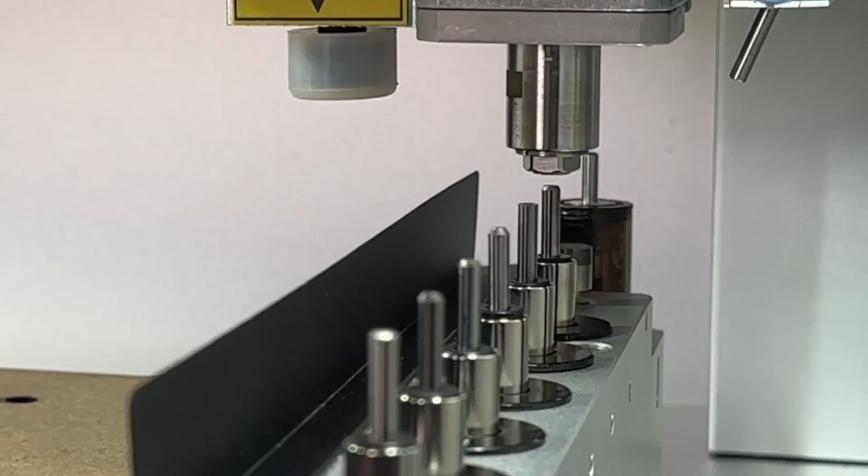Hi everyone, Jason here with another Makera CAM example project, and in this one we're looking at how to machine a multi-part wooden phone stand through one of our Easter themed and spring projects.

First, you can grab any of the files you need for this project from the knowledge sharing page on our wiki site. If you scroll on down, you'll see that we include all the files from all of our examples that we show. So for the Spring 2025 example projects, you can choose to download the Rabbit Phone Holder DXF file that we'll be using in this tutorial, or instead you can choose to download the completed Rabbit Phone Holder MKC for a full Makera CAM file, which we'll be creating throughout this tutorial as well.

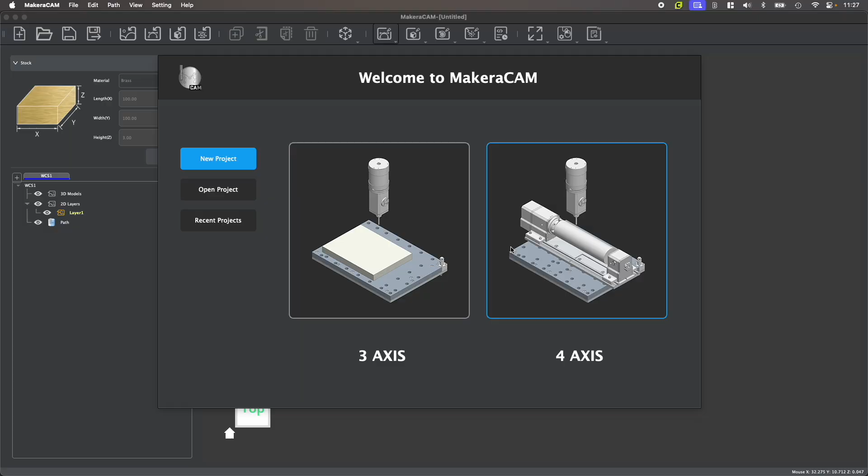Once you've launched Makera CAM, we can create a new 3-axis project, and the first thing we want to do is set up our stock to match the stock that we'll be using accordingly. I'll be using a piece of hardwood for this project that is 150 millimeters in length, 150 millimeters in width, and about 20 millimeters in height. So I'm going to set up my stock accordingly, like so.

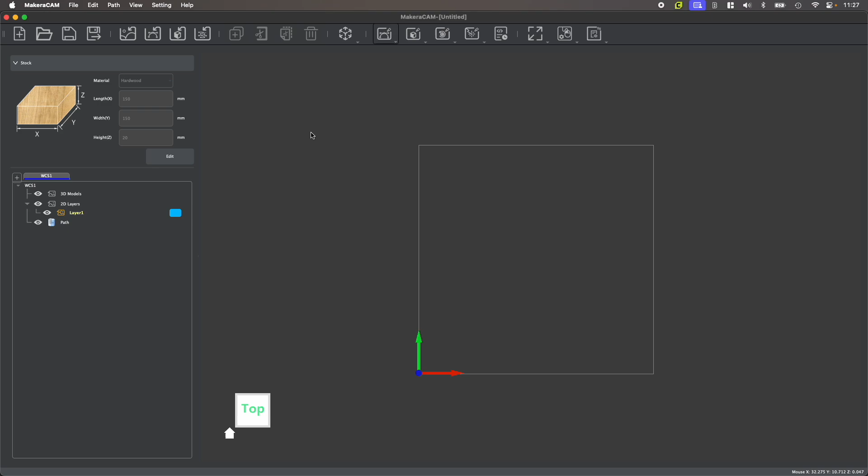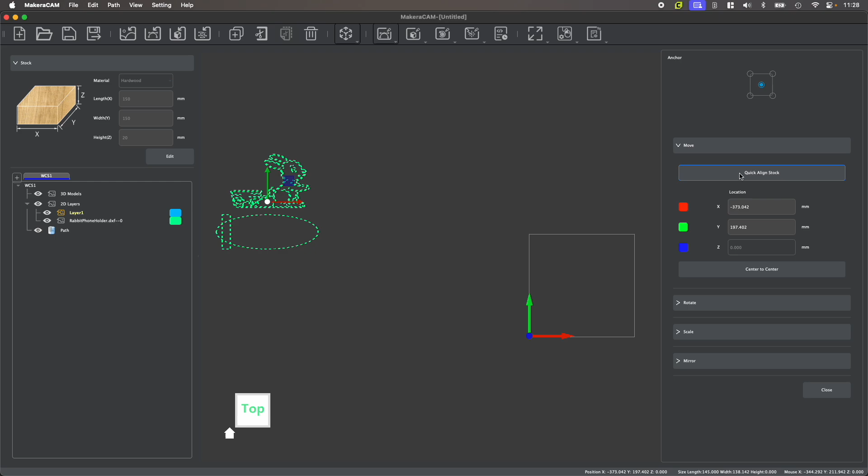Next, we want to import the design file into this document, which showcases how Makera CAM can work with 2D vector files as well as 3D design files like we show in some of our other tutorials. So I'm going to import that 2D DXF that you can grab from our wiki site, and you can see that it might not first land in the correct spot on your stock here. So after importing your designs, you can easily use the transform tool to move things, and I'm going to use the quick align stock button to center this design on our stock automatically, like so.

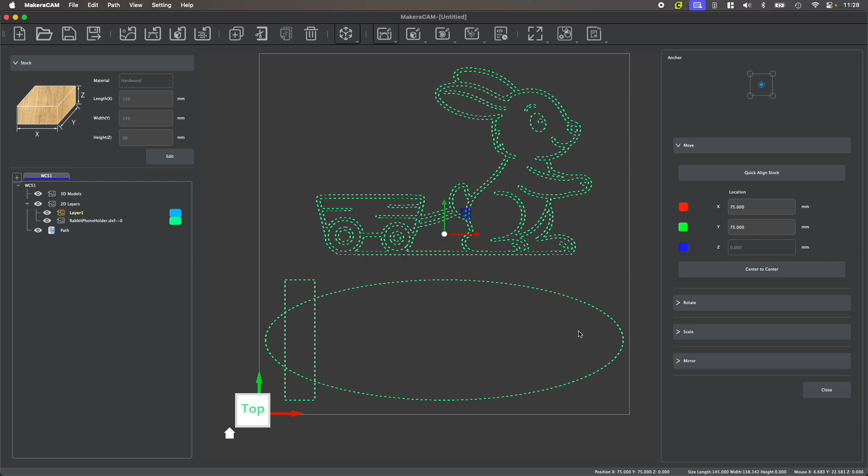You can also use the transform tool to rotate, flip, or mirror any designs that you import as well, though that won't be necessary as this fits onto the stock that I'll be using. You do also want to make sure that you have enough room around your design for any of your clamps and things like that. So keep that in mind on where you might put your clamps as you import your design here.

Now, this is going to actually be a two-sided project where we're going to machine the top side and then flip our stock over. And there's a couple different ways you can do this, but one of the best ways to do it is using simple alignment pins, where we might just insert pins in our design to help flip our stock over.

And I don't have any holes in my design to use for alignment, but we can use Makera CAM's Create feature by clicking on our Transform window and then clicking Create to create a simple 2D model. And we can create a simple circle that can be used for our alignment holes. So I'm going to make a circle with a diameter of 3.175 millimeters, or 1/8 of an inch. And I'm going to just simply place that hole somewhere in my stock that isn't too close to my design, like there.

Now, we need at least 2 holes for alignment. So I'm going to select this hole, then go to my transform tools and go to mirror. And what I'm going to do is I'm going to mirror the hole, but not along itself. I'm going to mirror it along the stock center, and I'm going to create a copy. So now when I generate this mirror, it mirrors the hole, but it actually mirrored it over the center of my stock in the horizontal direction. So now I have 2 alignment pins that are perfectly aligned horizontally and centered with my stock, which I can use to flip my stock over later during the manufacturing process.

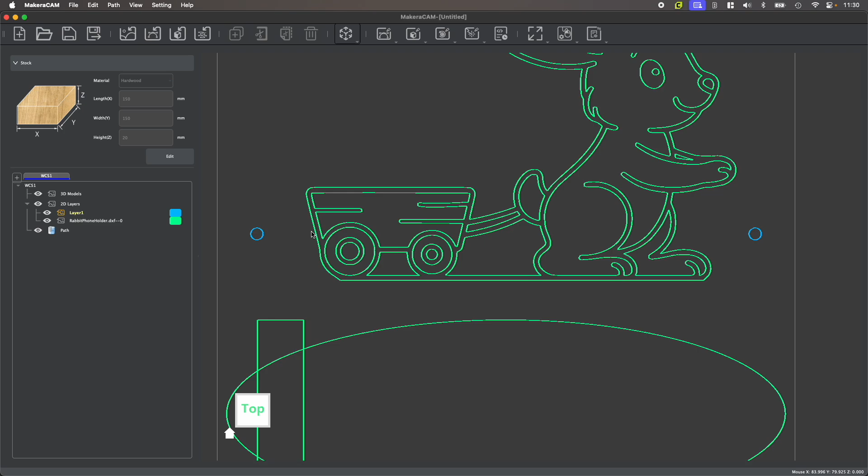Okay, so at this point we have set up our stock, we've imported our design, and we've also created some holes that we'll be using for alignment. Now, let's actually start to prepare the toolpaths for manufacturing. And we typically start with the smallest toolpath to the largest toolpath. So I'm going to select the intricate details of my rabbit here by selecting my rabbit design, like so.

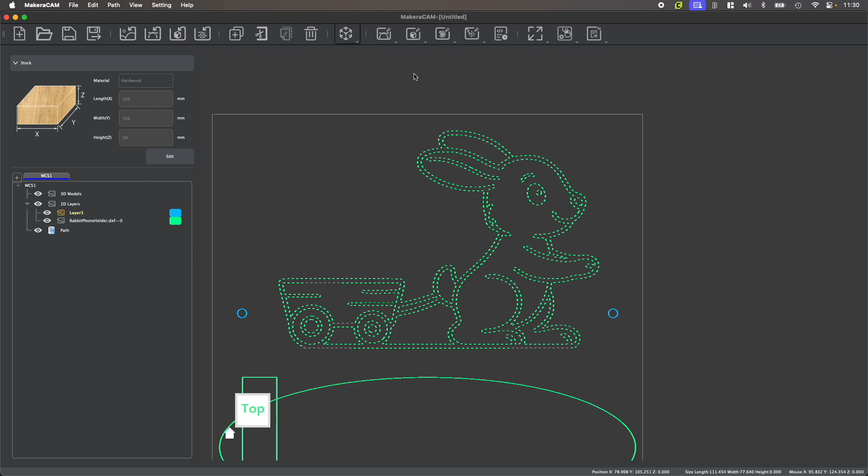And then we're going to use this to create a pocket. So what I'm going to do is create a 2D pocket toolpath. Okay. And the first thing we want to do is set our end depth, because we're working with a 2D design. That's something that we can set manually. So I'm going to set my end depth to be 0.5 millimeters to machine this pocket to be about 0.5 millimeter or so. I don't have to change my safe positions or anything like that,

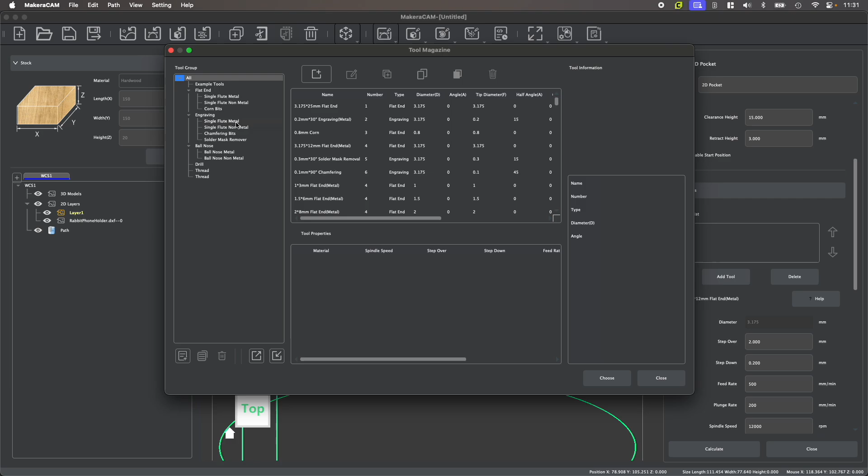but I do want to change my tool. So I'm going to delete the tool that I was using in my last pocket and instead grab a single flute engraving bit. So I'm going to grab a 0.5 millimeter engraving bit for this project, so a slightly larger engraving bit because it's a slightly larger pocket here that we're working with. And notice that my tool properties were set to hardwood automatically based upon the stock parameters that I set earlier.

So you might consider adjusting your default parameters, but in general, these default feeds and speeds are a good starting place to work with. One thing that you might want to change is your tool number to correspond to either the order that you're using this tool, so for example, I might use this tool first, or the number that this tool is loaded in the Carvera's automatic tool changer if you're using the Carvera for this project.

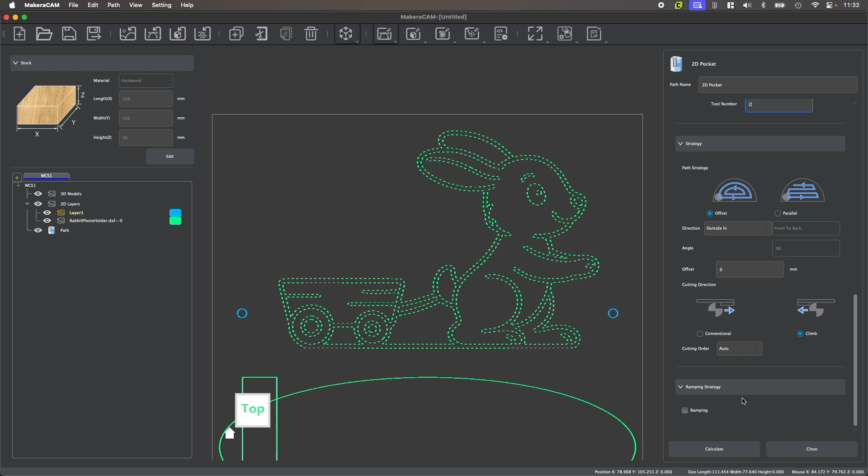Next, we can look at our path strategy. Offset works really well to clear out an intricate pocket design like this, so I'm going to leave that as offset. And I don't need to use ramping. That's a more gentle way to enter your stock, but with something softer like wood, that's not always necessary. But if you were using an engraving bit with metal, you should absolutely consider using ramping, as we discussed in some of our other tutorials. So I'll calculate this, and you can see we now have our pocket design for our rabbit here.

Now, the next thing that we'll do on the top of our stock is we can drill these holes. So I'm going to hold shift and select the 2 holes that we created, and now create a 2D drilling toolpath. So for our end depth, we want to drill not only through our stock, but also through a piece of wasteboard that we'll put below our stock that we can insert our alignment pins into. So I'm not going to drill to a depth of 20, I'll drill to a depth of 25 millimeters, which will be enough to plunge 5 millimeters into whatever wasteboard I put below my stock.

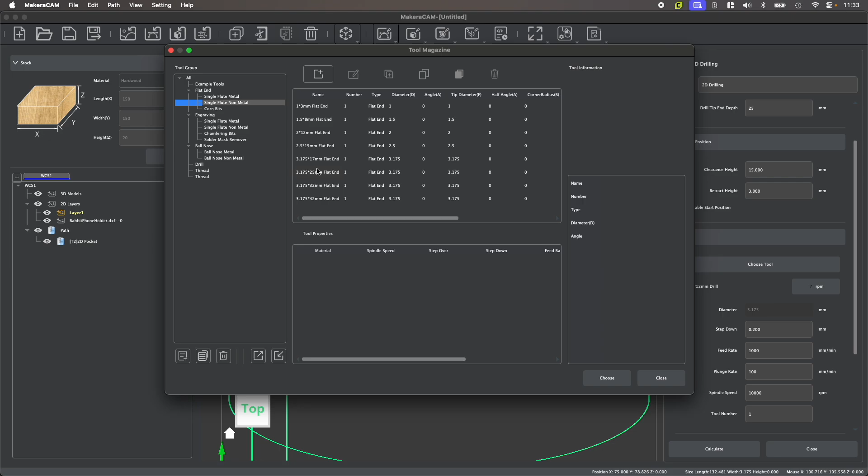For the tool, you would typically select a drill bit, but I don't actually have a drill bit that's long enough to do this. I don't have a 25 millimeter drill bit on hand. So instead, I'm actually going to use a single flute end mill. I can use my 25 millimeter or 32 millimeter end mill to do this drilling operation as well. So this is a 3.175 diameter bit, so that'll fit in my 3.175 holes for my 1/8 inch alignment pins just fine. I have hardwood selected as my default cutting parameters. And I can again choose to modify these parameters if I'd like, or change my tool number if needed.

Now we do want to enable a retract, so the retract will prevent this tool from just plunging straight down, and instead we'll actually use like a peck drilling operation. So I'm going to choose a relative retract, so it will retract a little bit each pass, and I will keep this to be a relative retract of 1 millimeter. That should work fine for this path strategy, and then I can calculate this toolpath.

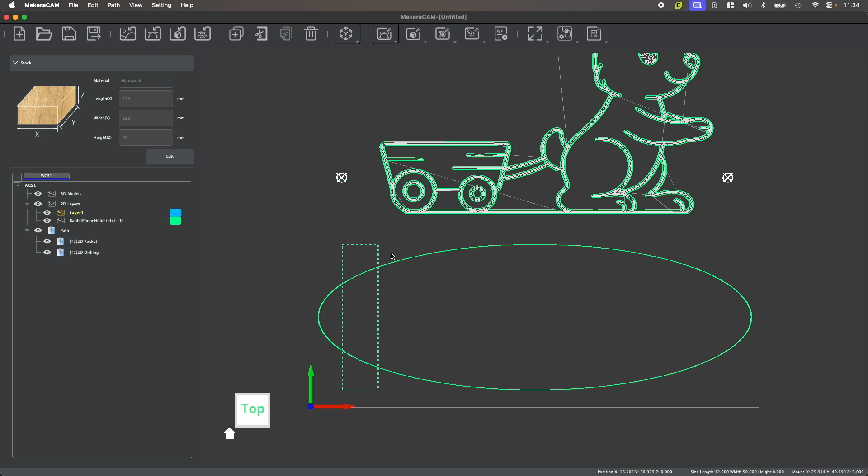And then we have one more thing we're going to machine for the top here, and that's going to be this pocket where we clear out the area for the phone to rest in, a nice little pocket here. So let's create another 2D pocket toolpath. And for the end depth of this one, I'll set this to be 6 millimeters, which should be a nice pocket for our phone to rest in. And for our tool, I think I'm going to use the same tool I used earlier for the drilling operation. So I'll select my 3.175 by 25 millimeter end mill.

This is much longer than I need, so I could instead choose to use, let's say, a 12 millimeter or even an 8 millimeter end mill instead. But this will prevent me from having to do another tool change, and there also won't be a lot of stress on this bit. So a 25 millimeter end mill would work fine. For a pocket like this, you also might consider using a ball nose bit if you wanted to. That would also work fine. So there's a range of bits you could choose to do some type of pocket clearing path like this.

I could again choose to modify the parameters, but I won't change my tool number, so it'll be the same tool number assignment as in my previous toolpath. That way I won't be prompted for a tool change for this one.

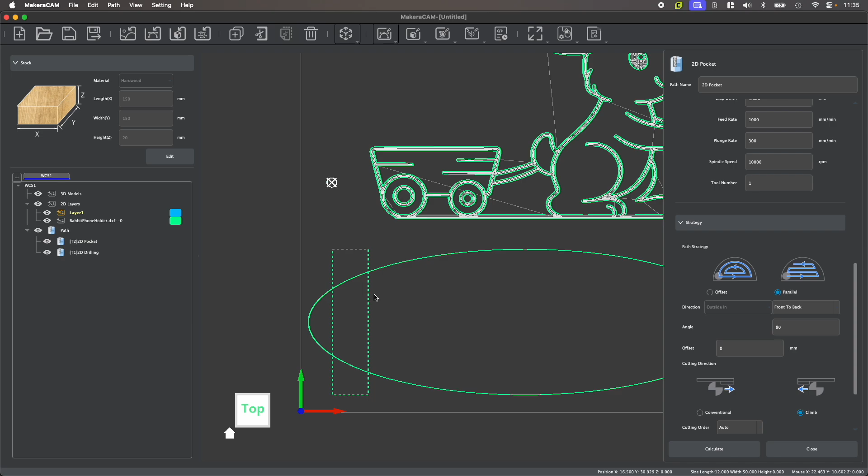This time, for the path strategy, let's choose parallel. Rather than tracing the perimeter and working around in an offset, parallel will just sweep back and forth, which is a little quicker for clearing out a larger area like this. It's not as well refined for something intricate like we did earlier with the rabbit.

It should work well for this pocket clearing path. Again, I'm not going to enable ramping, as we discussed earlier—it won't be necessary for wood. So I can calculate this, and that'll clear out this pocket.

And that concludes the toolpaths for the top of the job. We won't cut out this part from the top. We will cut the part out from the bottom.

At this point, I'm actually going to right-click my paths and save these paths and export them as a G-code file for the top, as we go here.

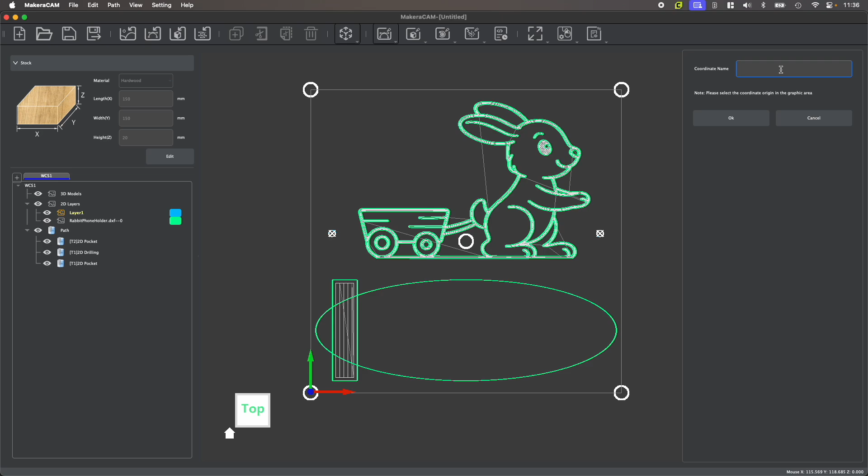I'm now going to start working on the bottom. You could in theory make a new design document, but in MakeraCAM, we can also just create a new work coordinate system that works with the bottom. Let's click this plus button here, and let's name this new coordinate system bottom.

Then what I want to do is rotate and flip around, just like I'm going to flip my stock in the real world. You'll see that our default origin point is the bottom left corner of what would be the top of my stock. So now I'm going to rotate this around.

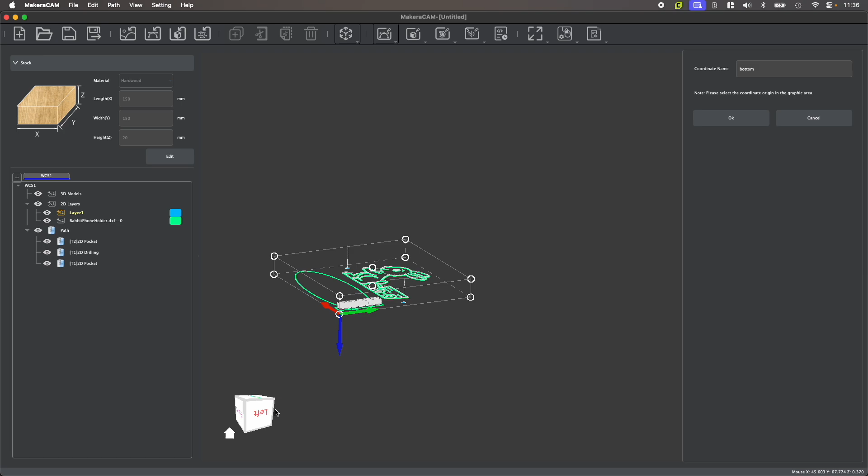So I'm looking at the bottom of my stock, and I want to select what would be the top left corner of the bottom of my stock, which would be this corner right here. That's going to be my new origin point for the bottom work coordinate system. I then press OK, and you'll see we have a shadow of our toolpaths and design on the bottom of our stock, which is actually the top, but the new relative bottom, if you will.

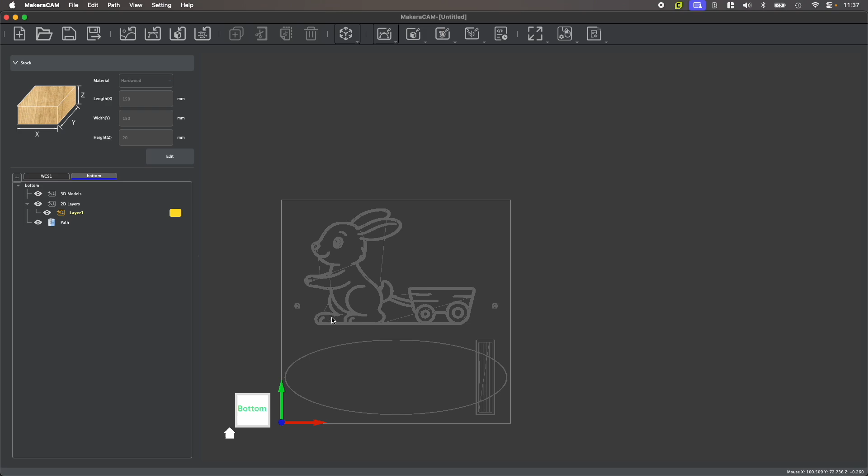Now we can re-import those vector designs we used earlier, and we have to get things aligned here. Using the transform tool, I'm going to click move and do my quick alignment, just like before. If you made any scaling adjustments, you'd have to scale this to be the same as before, and you could use manual alignment or set manual positions.

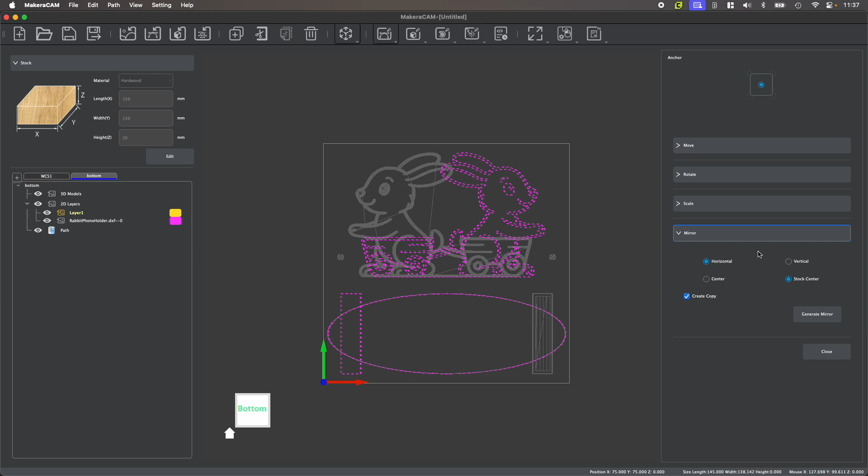And then we're going to mirror this across the stock center, but I don't want to make a copy, I just want to mirror it. That should align my design just fine. You can see with the shadow of our work coordinate system preview that everything is nice and aligned there.

You could also use the center to center tool to align your design features if you couldn't mirror things. That works well, as we show in some of our other videos. But this was a pretty simple alignment and flip.

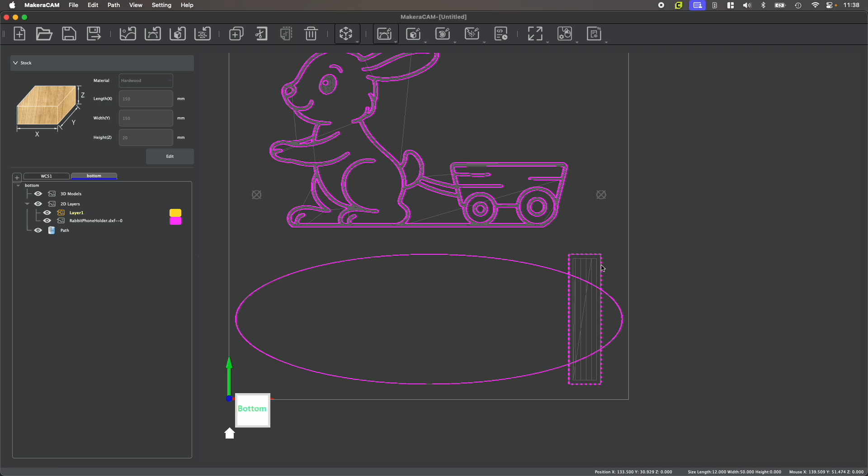Now, we won't actually need this box because there won't be a slot for the phone on the bottom of the base part here, so I'm going to delete that box.

If you find that the toolpaths are distracting from the first work coordinate system, you could always come over to your first work coordinate system and just hide the different features, so that from the bottom you can't see those if you find that a little distracting.

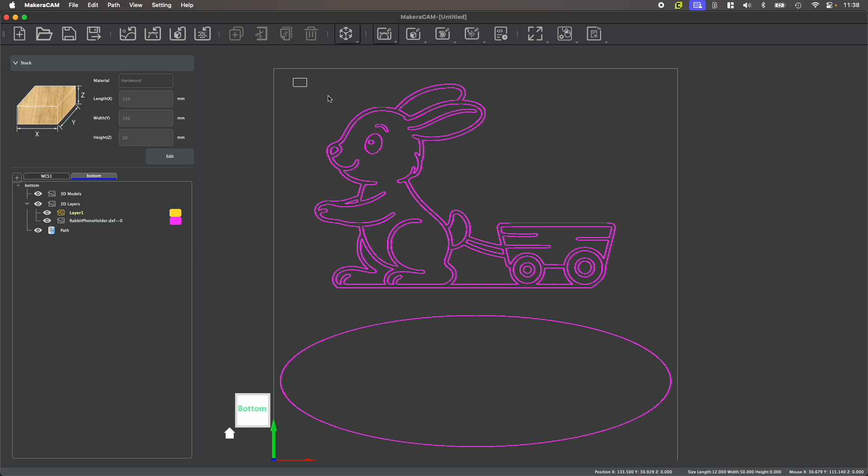First thing we're going to do for the bottom is select our rabbit, and we'll create a 2D pocket, setting this to the same settings we used for the rabbit engraving on the top. That was an end depth of 0.5 millimeters.

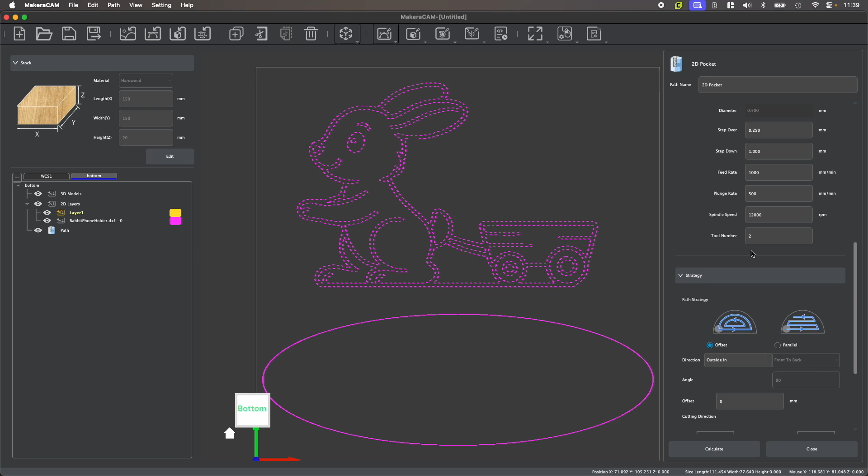That was using our 0.5 millimeter engraving bit set to hardwood, and we can make sure our tool number is assigned to be the same, so you wouldn't have to reload it in a different slot of your tool changer. We'll use offset for our strategy, and we don't need ramping, so we can calculate that toolpath.

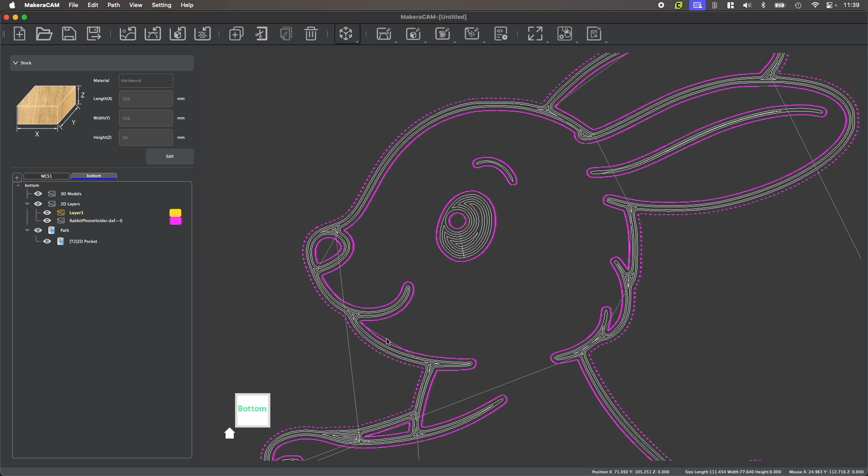Next, we're going to cut out these parts using contour toolpaths. In theory, you could select the outline of the rabbit and the outline of the base and do one contour toolpath. But I actually want to offset my cut a little bit for the rabbit, cutting a little bit away from my pocket. If I selected both the base part and the rabbit part, I'd have to offset them proportionally in the same toolpath, which I don't want to do. So let's create two contour toolpaths here.

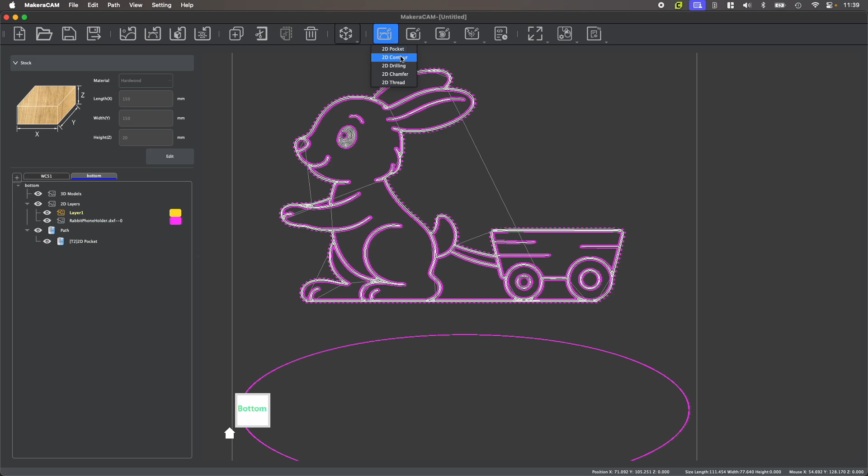I'll first select the outline of my rabbit. This time I didn't select the whole design, just the outline. Let's create a 2D contour toolpath. Now I want to machine a little bit past my stock to make sure I cut all the way through, so instead of machining to an end depth of 20 millimeters, let's go 21 millimeters. Then I need to select a bit that's long enough to do that.

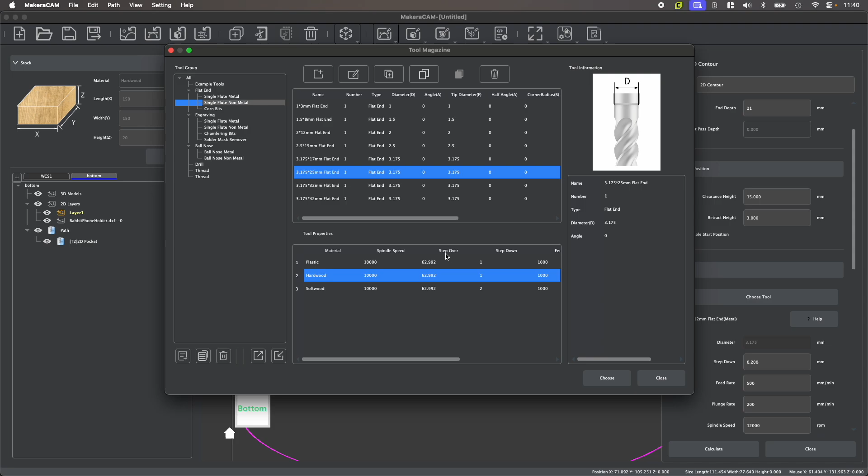I'll grab the same 3.175 by 25 millimeter end mill with hardwood set that I've used earlier in this tutorial, again making sure that my tool number matches. Now for the strategy, we want to run along the outside. This will run our bit along the outside of the profile here to make sure that the design is not cut in any way.

But this is where I mentioned I want to do an offset. So I don't want to run right along this perimeter—I want to leave myself a bit of a gap. Let's say something like 2 millimeters.

We don't need to use ramping, as discussed earlier, but we do want to enable tabs. Tabs will hold the part in place after this contour is cut, because this contour will separate the design part from the rest of the stock, and we don't want it to then project or fly out of the material or anything like that, as that could damage the bit, damage the part, etc.

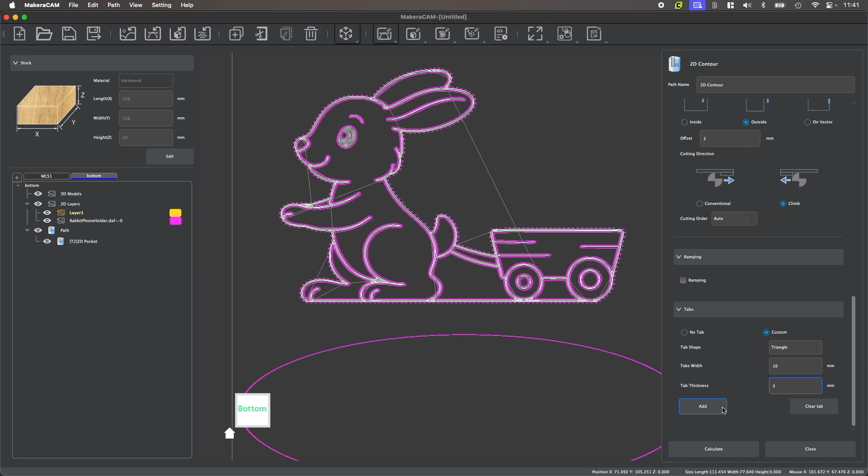So we can create tabs by clicking custom, and these tabs will remain in place to hold the part in place, and then they can be cut away later. You can choose a rectangle or triangle shaped tab. I'll choose triangle, and I'm going to set my tab width to be 10 millimeters and my tab thickness to be 3 millimeters, then use this add button to click along my perimeter to draw a few tabs.

If you can, put them along the flat spots of your design, as that will make cutting the tabs away easier to do. But you might also need to place them in a couple more intricate and difficult locations to ensure that the entirety of the design is held in place during machining.

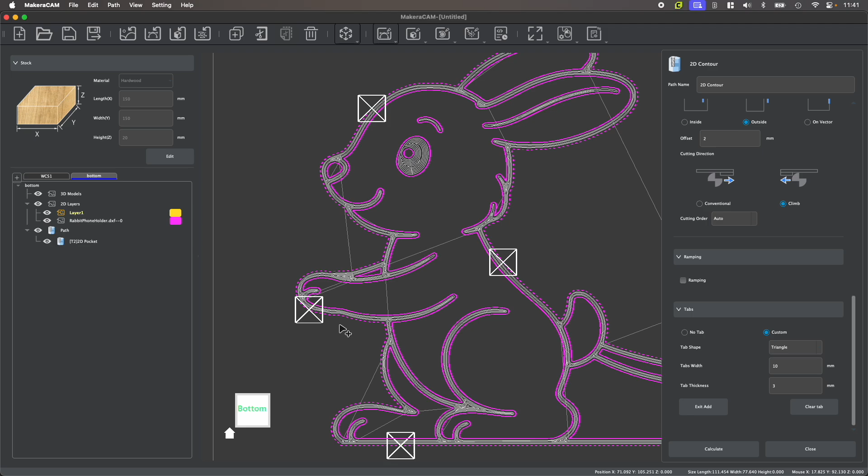So I've placed a couple tabs here across my design, and then I'm going to click calculate. Now you notice that that will calculate your toolpath. You can see that the toolpath is placed quite a bit away from the design here because of my offset, and you can also see that there are some triangular shaped tabs along the perimeter of my design.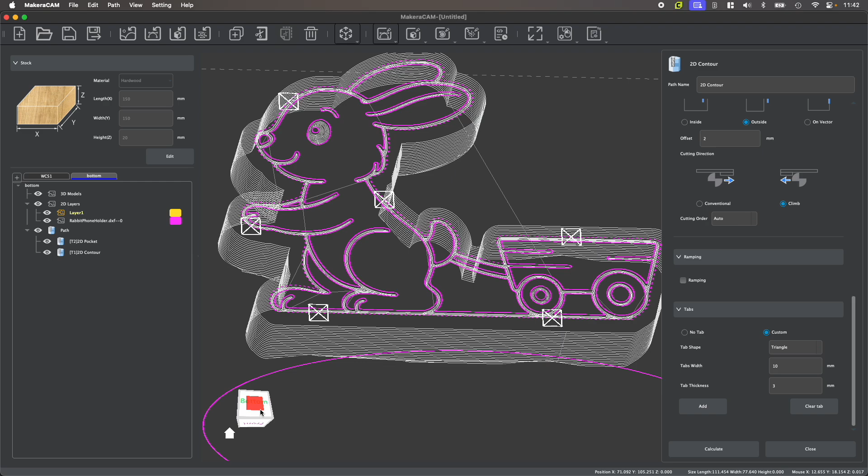So let's close that, and then let's click on our base part perimeter and make another 2D contour toolpath. For the most part we can keep the same settings: end depth will be 21 millimeters, using our single flute 25 millimeter end mill there, running along the outside, but this time I won't put an offset, so I'll set my offset to be 0. We don't need ramping, and we do need some tabs, so let's click the add button and add maybe 4 tabs along this base part here before calculating our toolpath.

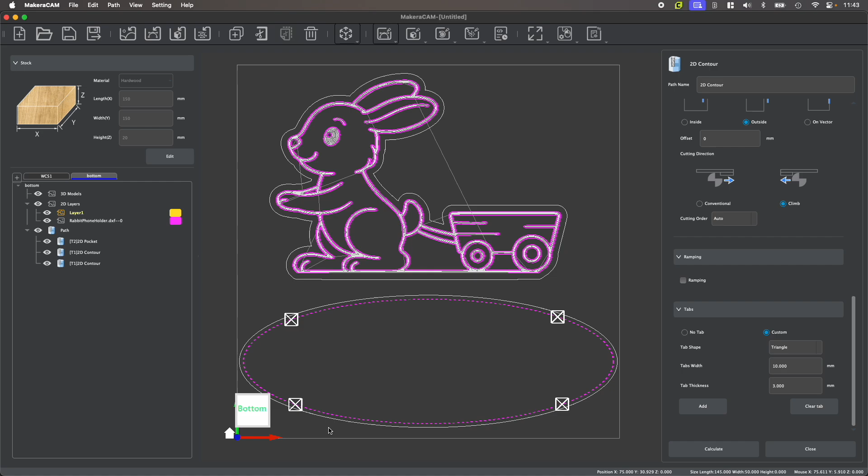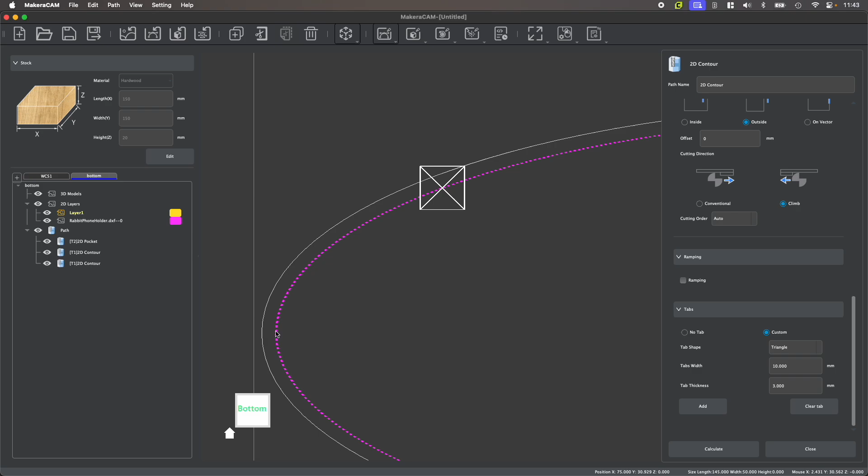Now you can see that the toolpath runs much closer. Now you'll notice that there's a gap, of course, right? So you might be thinking, I thought the offset was set to be 0. But the gap that you're seeing is because the cutting tool is centered along this pink toolpath line. So the cutting tool of 3.175 millimeters will be centered along this line, which means half of the cutting tool will be coming right along my base part here. All right, so I'm going to close this.

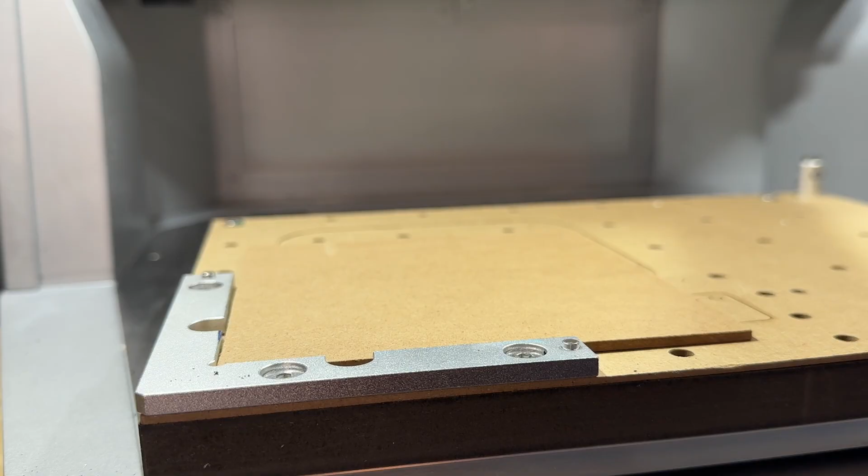After generating all the toolpaths for the bottom of the project, we can export them as a G-code file for manufacturing as we did earlier for the top of the design. But before we begin to manufacture the design, we must load our stock. Our piece of wood can be loaded onto a piece of wasteboard placed onto the bed of our Carvera Air, and ensure that this wasteboard is thick enough to compensate for the pinholes we will be drilling that will be used to flip our stock later on. We can then use a combination of corner clamps and top clamps as shown.

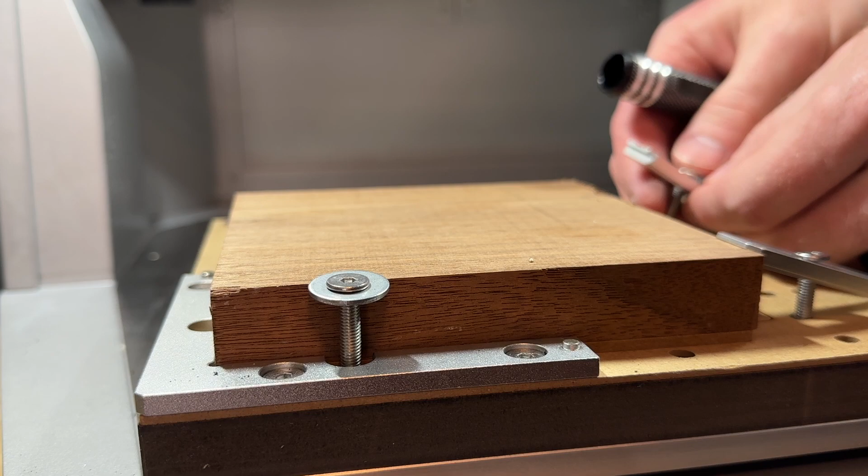With thicker stock like this, you might want to use risers or washers to allow you to better grab onto your stock, or consider using a different type of clamp like side clamps to grab the edge of the stock instead. Then in the Makera controller app, we can upload our exported G-code files and prepare them for manufacturing after we've connected to our machine.

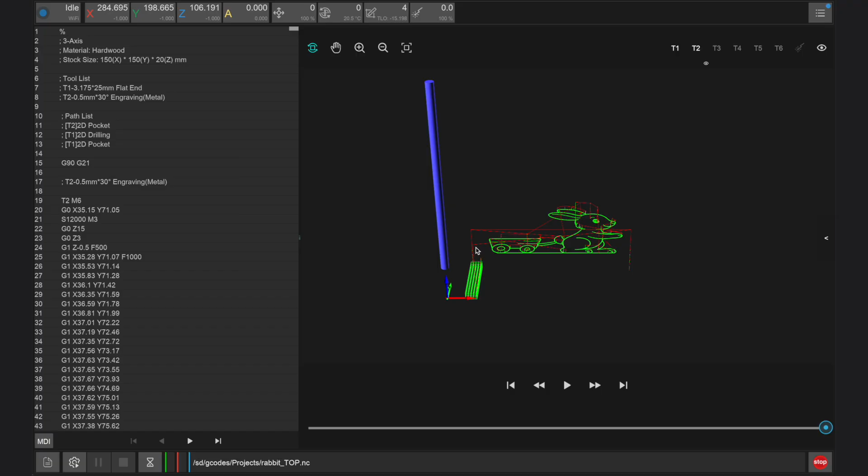I'll upload both the top and bottom file at the same time, but of course we'll be working with just the top file as we begin to manufacture this project. So with the top file selected, we can preview our design. We can also preview the G-code, and then we can head over to the Config and Run window to configure this project for manufacturing.

If you'd like, you can adjust your work origin offsets. However, these offsets must be proportional and match both the top and bottom in order to ensure that the flip is successful. So we would always recommend that you set your work origin offset to 0, 0 from your anchor position and instead make any offsets manually in the CAM file, as discussed earlier when we were repositioning the design files in Makera CAM. Scan margin can be enabled, and that will trace the perimeter of your design on your stock to ensure it's going to be machined in the correct location.

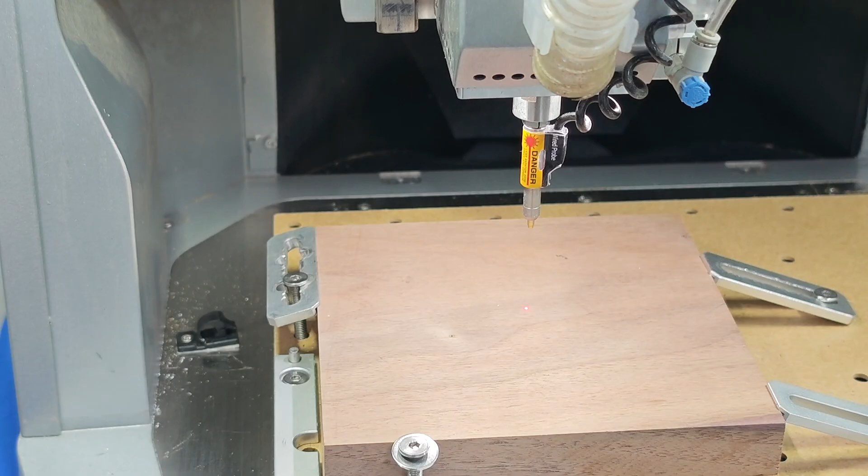And we can use auto Z probe or auto leveling to check the height of our stock and compensate for any deviations automatically. For something like this, I'm not actually going to use auto leveling, but I will use auto Z probe and set the probing point to be in the center of my stock, which would be at a work origin of 75 by 75 based on my stock size. So that'll probe right in the middle of my stock, which is helpful when you're doing a flip and machining through the surface of your part.

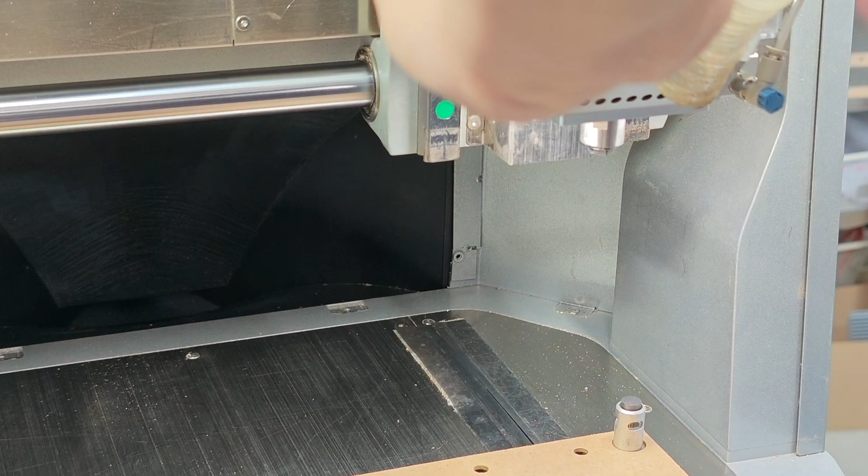Once set, we can click Run to begin to manufacture the top of our design. After completing the scan margin and Z probing sequence, the Carvera Air will prompt us to load the first tool, while the Carvera will select this tool automatically. After loading tool 2, the 0.5 millimeter engraving bit into the Carvera Air using the quick tool changer, we can press the button on the top of the machine to continue.

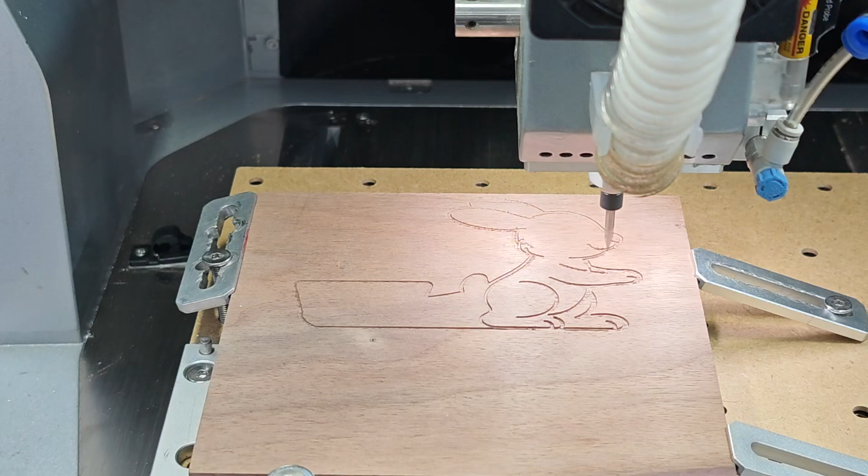The engraving bit will machine the detail in the Rabbit design before the Carvera Air prompts us for a tool change. It will then complete the drilling operation using our alignment holes with the end mill that we've selected, followed by a pocket clearing operation for the base part using either the same bit or a different bit depending on how you set up your CAM profiles.

Once the top of the project is completed, we can unclamp it and remove it from the machine without removing the wasteboard that we drilled into. We can then insert alignment pins into the holes that we drilled into the wasteboard, flip our stock horizontally as we did in our CAM program earlier, and align it to the pins rather than the corner clamp. After aligning it, we can use clamps to secure the stock before continuing to manufacture.

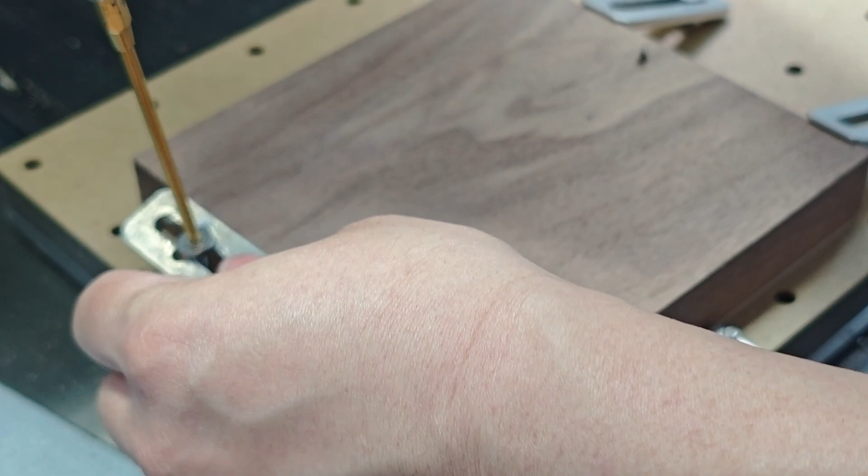Back in the controller app, we can now select the bottom design file and open up the Config and Run window. Here we want to make sure that we don't adjust the work origins to keep our design aligned and proportional. We can choose to adjust scan margin and auto Z probe, and we can choose to use auto leveling if desired, but for this, I'll use scan margin and probing the center of my stock just like I did for the first side. Once everything's set, I can click Run to manufacture this project.

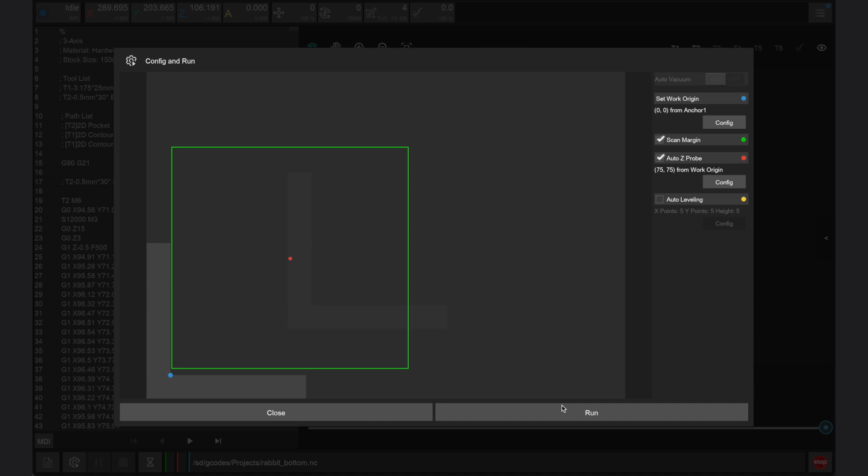After the probing sequence, we can load the engraving bit to machine the detail pocket of our design for the rabbit on the bottom side now, before loading the single flute end mill to cut out each part using a contour toolpath. The Carvera Air will work through the stock by cutting along the perimeter of our designs, but not through the tabs that we created so that the part will remain in place.

Once finished, we can remove the part and safely cut it and sand the tabs, and that's all there is to it. This type of project takes advantage of the Carvera and Carvera Air's ability to easily set up your CNC projects through Makera CAM for something as simple as two-sided machining projects like this one.